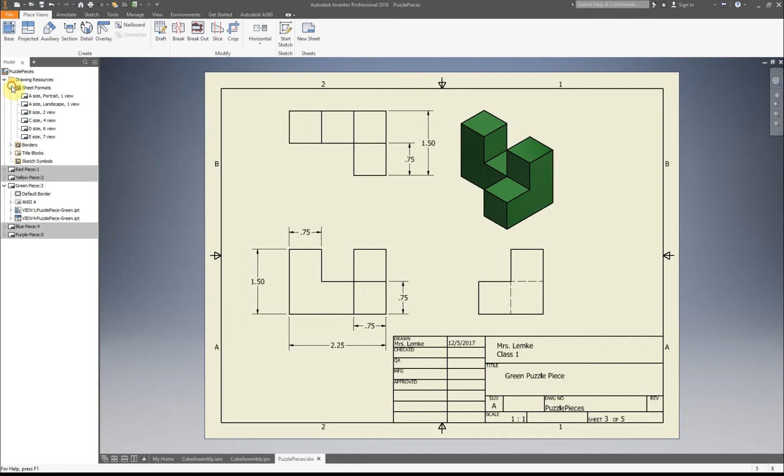To add that in, we're going to click on the arrow next to Drawing Resources, click on the arrow next to Sheet Formats, and then double click on your A-size landscape.

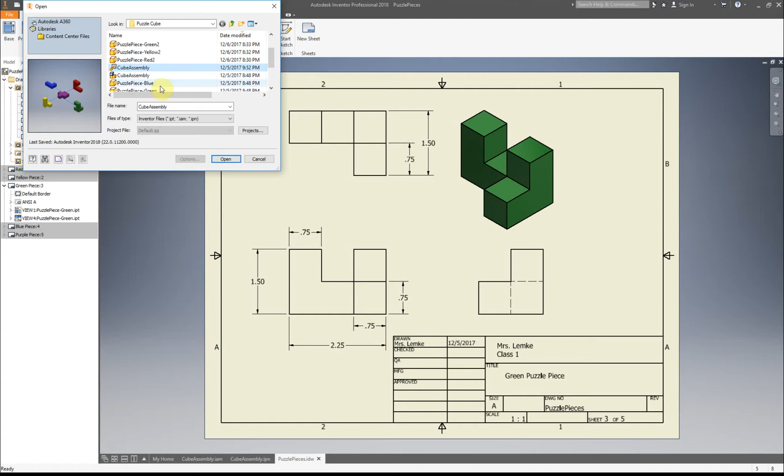What we're going to do here is find our assembled cube, and we're also going to need our presentation view, because the page we're using is for both of those. Right now I'm just going to do the presentation view first. Click OK. It brings it in at a weird angle right now for what we're doing.

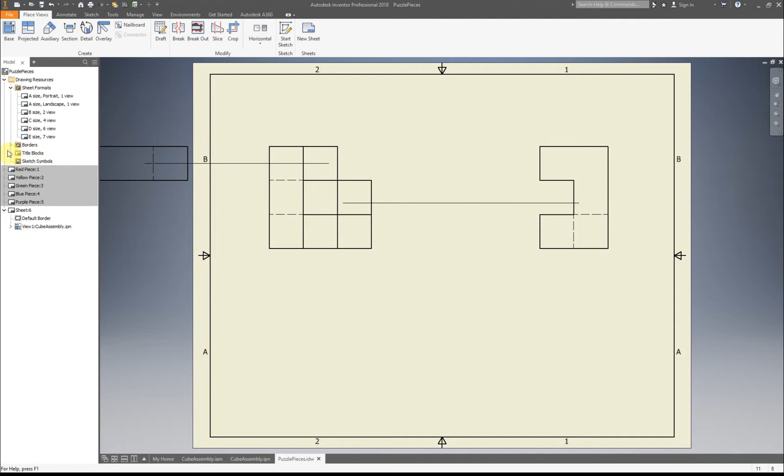Before I change this, what I'm going to do first is just change the title block size so I know how much room I actually have to use. So ANSI Large underneath my sheet, I can delete that. Then next to title blocks, click the arrow, double click on ANSI A, and now it's the correct size, so I know what amount of room I have to play around with.

For this one, we need it at an isometric angle, and we're going to need it shaded. Also, this is going to be too big, so let's shrink that down.

That might be too small. So I'm going to do this as three-quarter. I'm going to click OK.

For this, I don't want any hidden lines, so I'm going to turn the hidden lines off. There we go. I'm going to make sure that this is farther away from the edge. I might need to actually shrink this or change my file a little bit.

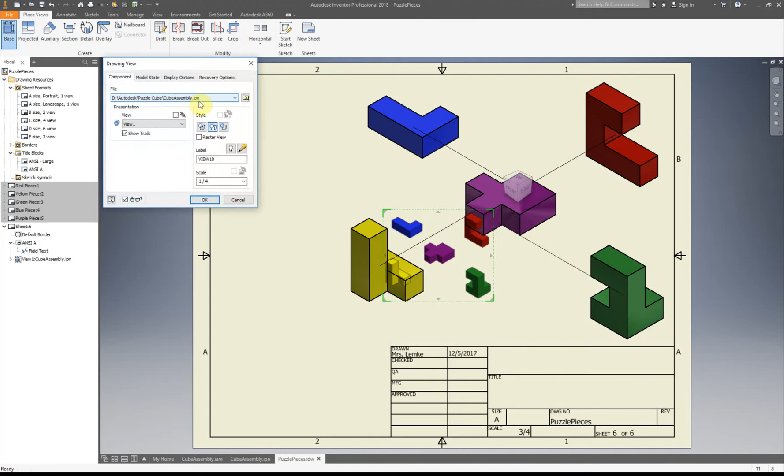The next thing I need to bring in, we're going to go to Base. We're going to find our assembled cube. Again, because I have it open, it's down here already.

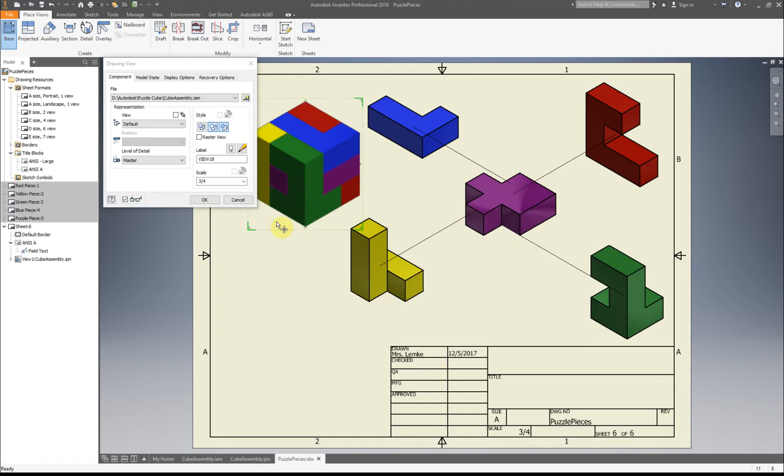Now I'm going to use the exact same size as before, and I also want to do an isometric that is shaded for this one. I want to move this over to here and place just another view there.

This gives us a good idea of what our object looks like, taken apart and also put together. So is this the proper way to do it in industry? Not exactly, but for the grade you're in right now, for high school, it works just fine. Plus it's a good thing to have it all side by side so you can see the comparison to each other, especially because this one is lined up the exact same way as this one, at the same angle, so you can see exactly how these pieces go together in your puzzle.

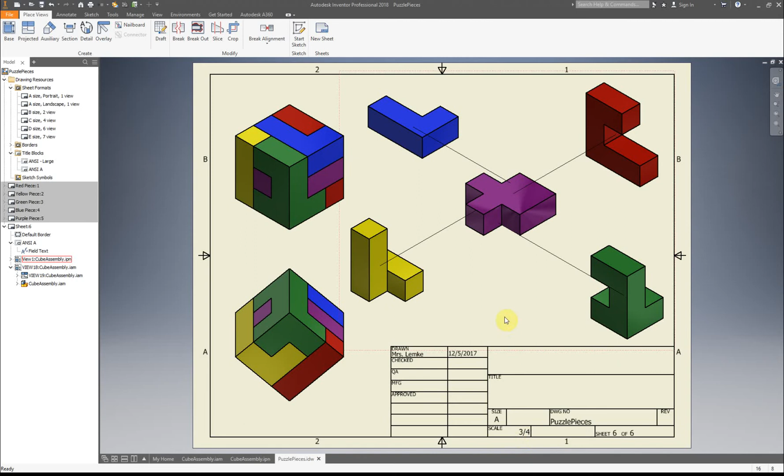Don't forget to add in your title, add in also name and class, and for this, your scale for both of these have to be the same. They have to be the exact same thing. So for this project, what I've found is three-quarter seems to work very well, and also one-half seems to work very well. So one of those two is probably going to be the one you're going to be using.

Just like I said before, you're going to want to make sure to go to File, Export, PDF for each one of these pages, so then you have all of these to put together for your portfolio at the end of the project, or just to hand in the work drawings together as a bunch. Then at the end, when you download and turn all those pages into PDFs, you're going to go online and find a PDF merge site. I'll put a link in the description for one that I'm currently finding the most useful, but really you can use any one that you find out there.

So that is everything for your work drawings.